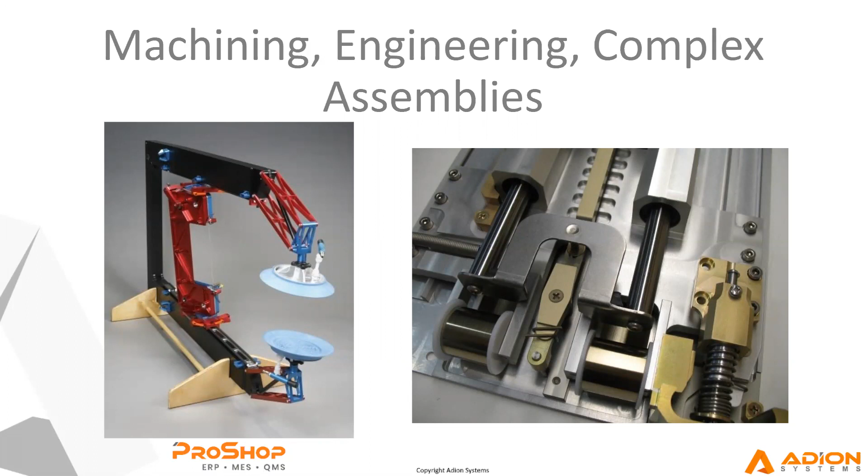So as we take a look, ProShop was actually founded as a machine shop in 1997 with some graduates from Western Washington University in the Vehicle Research Institute. They wanted to take everything that they knew and everything that they did and start servicing the industry. In the Pacific Northwest, most of that industry is in aerospace, but we certainly did a lot of work in a lot of other areas as well - machining and engineering and complex assemblies. We really thought that we could bring all of this expertise into the industry and serve our customers best. We were using Excel until about 2000.

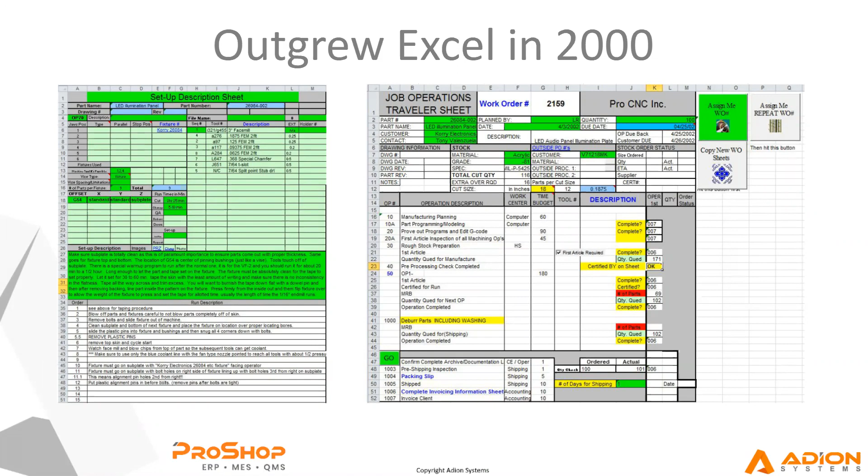2000 happens to be the year that I came on. I'm a machinist by trade, as you probably saw in my profile. We were really just doing everything we could to digitally manage our system and digitally manage our growth. But of course, with Excel, we still had paper around the shop. We were still losing things, and we had no data collection. We were able to see some information if we wanted to dive through spreadsheets or folders, but it was very difficult. So we started developing ProShop in 2000.

ProShop was originally developed in a web browser, where it still is today, and we have continued to grow that software over time.

In 2008, keep in mind we were a machine shop, but our largest customer came to us and said, hey, we want to buy your software. This is Rich Olson—he was actually an employee of ours, moonlighting with us on the weekends. His main job was working with our largest customer, South Arrow Marine. They approached us and said, let's take a look at your software. We think, based on what Rich has said, this could be a really big thing for us.

Of course, being a machine shop, you're like, that's crazy, what are you talking about? But they were fairly insistent, so we helped them implement it. In the first year, they saw huge gains: 20% overhead reduction, 90% reduction in late orders, 400% planning throughput, and 300% ROI in that first year.

At that point, we as a company stood back and said, okay, we must be doing something right. I think a lot of those things were what Jamie was talking about earlier—being able to address what the job needs, being able to address what the customers' needs are, and being able to see that all within the system.

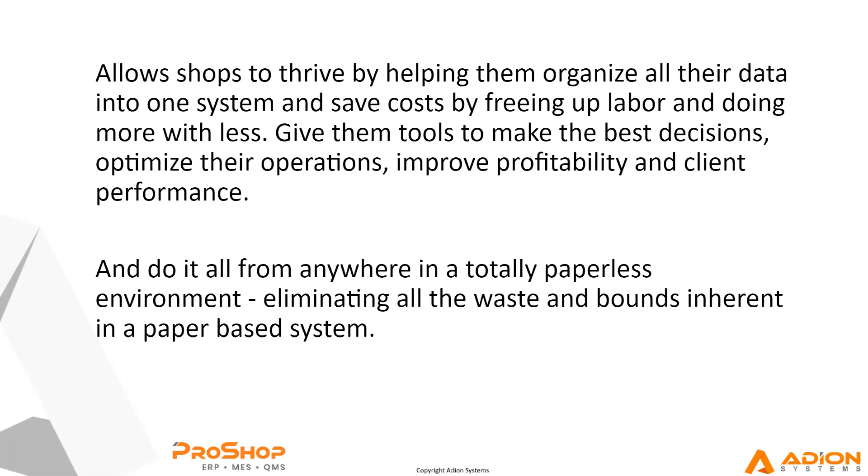So as we take a look at what tools ProShop has to offer, I've just got a few quick slides here, but I like to say that we do everything from the front door to the back door.

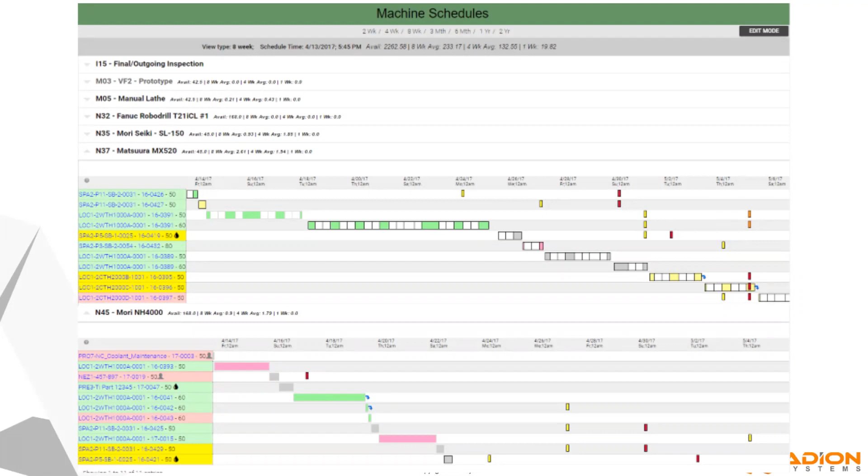So when new work gets entered into the system, whether that's right from estimating or from customer service, all new jobs are automatically created on the Gantt charts, and then they're automatically updated as work is accomplished. Really what we've tried to do is boil down schedule management to just that, actually managing the schedule, not having to input data and not having to update things. We want the system to do that because it's already collecting all that data automatically.

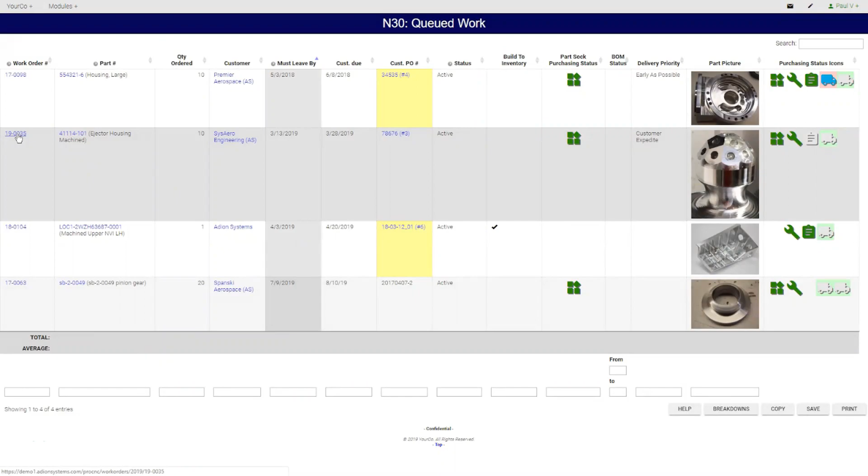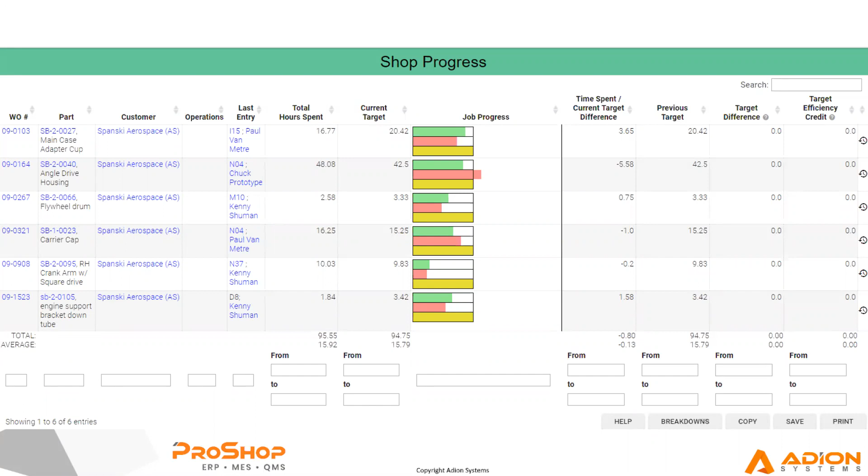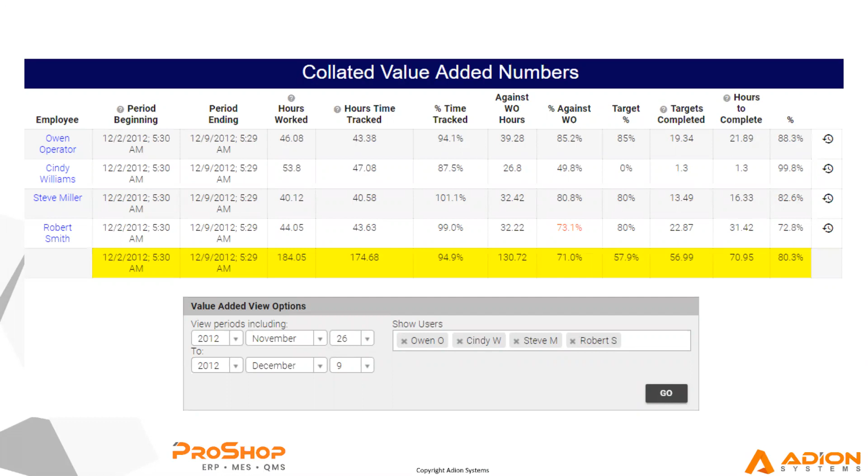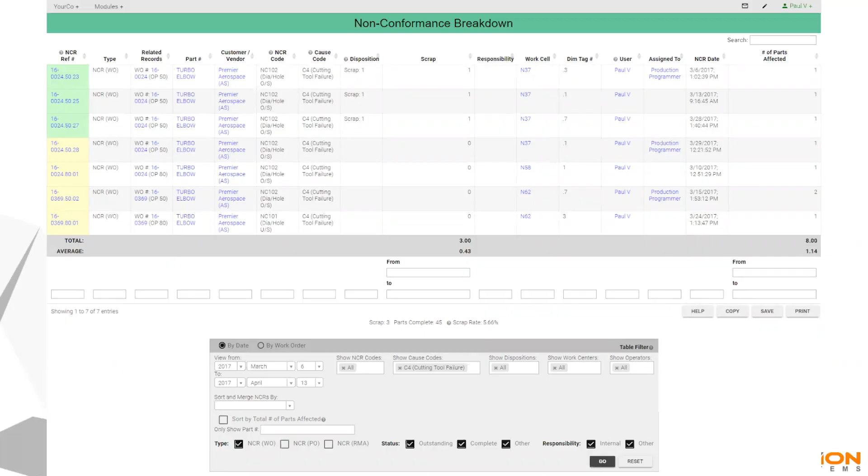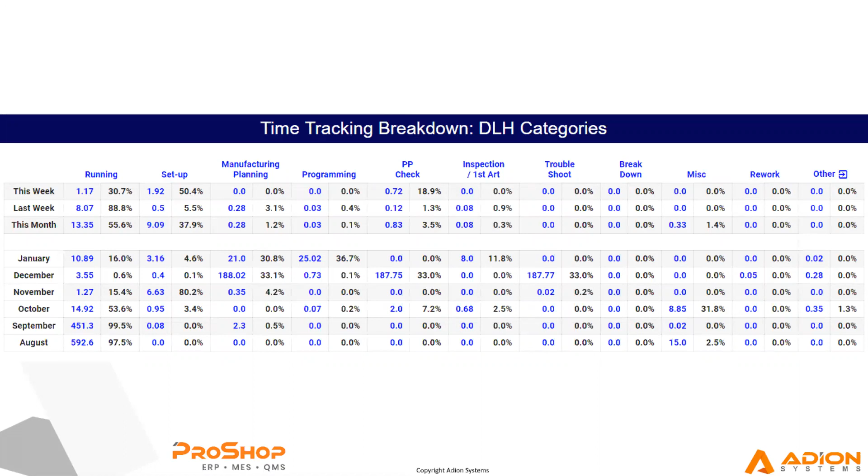As we're moving through time tracking, we move into a much more granular view of what you're doing. We move from a macro view of how the shop is doing into a much more condensed, granular view of where you're spending time as a company. Are you doing running and setup? Are you doing a lot of troubleshooting or miscellaneous? This is just one screen, there are several for this. You can even see how much time you're spending on maintenance, cleanup, Kaizen, or general improvement. All of those are options you can track and report very quickly and easily in the system. I'm going to jump now to a live demo to give you a sense of what it's really like in ProShop.

As I mentioned before, we're a web-based system, so we're all in a browser right now, using standard browser functions like shortcuts just to get where I need to be. I'm going to start at the schedule again and move right into that. I can see in real time, this is my schedule, and I can see that I've got two jobs on this schedule right away that are in trouble.

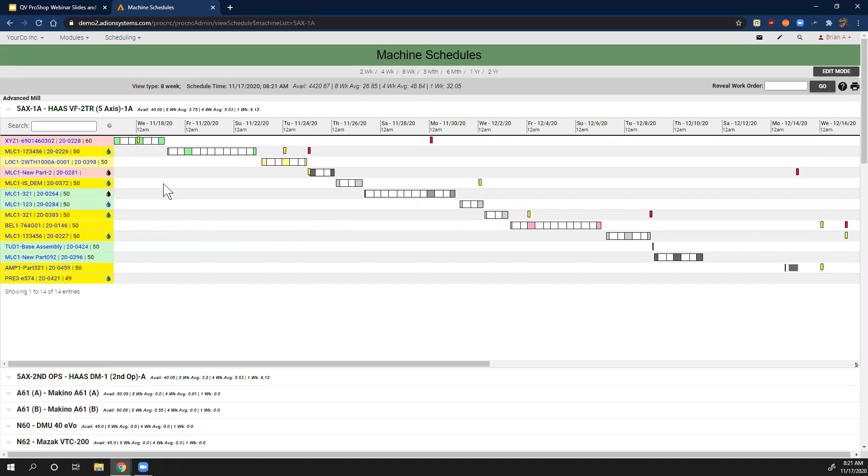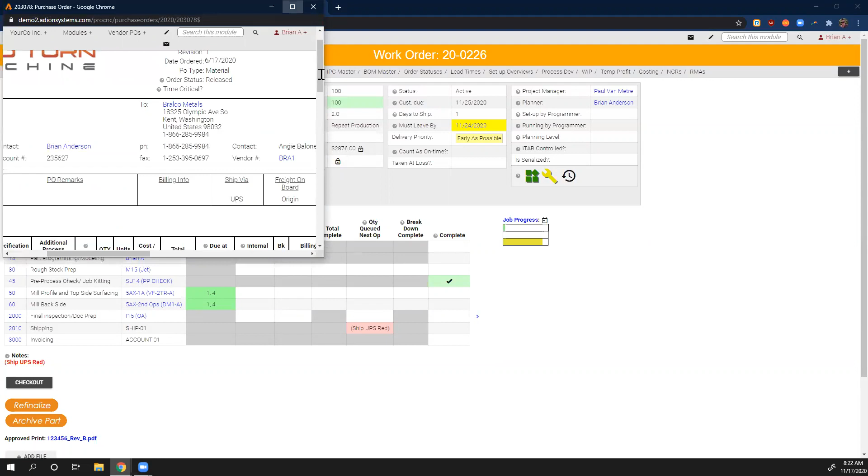As I look through any of these things, I can dive into any information. Maybe I want to take a look at the next job here—this is the next job coming up. It looks like it's still got to get through a little bit of planning, and it's got some material on order. If I click on this, I'll be able to see the material in the purchase order that goes with it, and the material needed for the job along with the material cert that goes with it. All of that is connected and easy for me to find.

If I want to know more about the actual part and how it was quoted, I can dive into an estimate right from there and see all the information I need to know how this job was built from the quoting phase—what was the expectation of machines, what was the expectation of time. All of my out-of-pocket costs and any of that kind of stuff I can easily access from here.

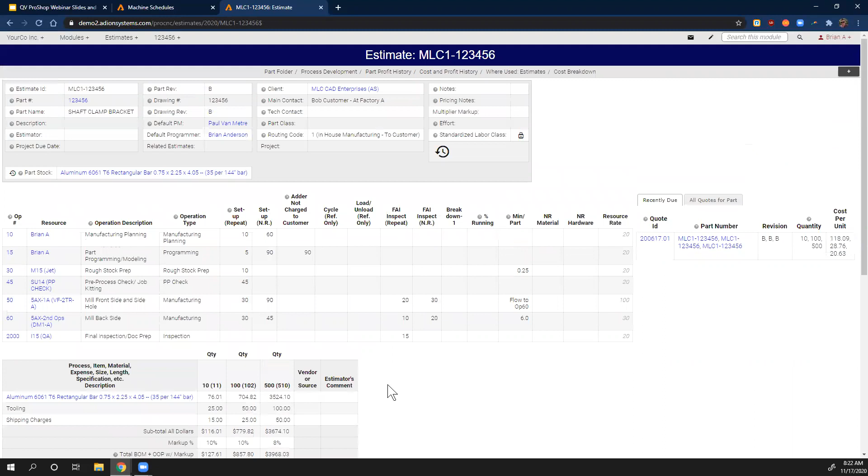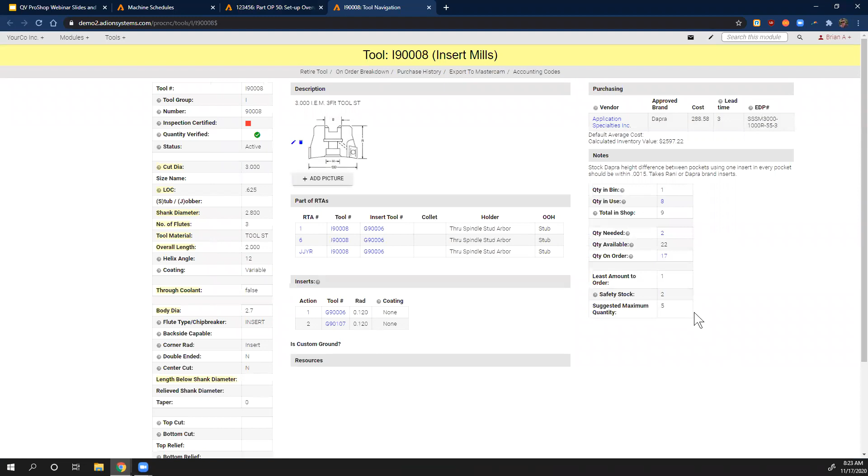When I want to take a look at my work instruction, I'll go into each individual operation and take a look at my built-in work instruction, complete with my fixturing—what fixtures am I going to use here—and all of my cutting tool list, which links directly into my cutting tool module, so I'll see every single tool I need, the tooling information and availability for it. All of my set work instructions, what we call run descriptions, can all be visual.

And all of this can be updated on the shop floor in real time. So if we don't have this information prepped and ready to go, we can give our shop floor folks some tablets with cameras, or their PCs will do the same thing, just to add that information in real time as they move through the system.

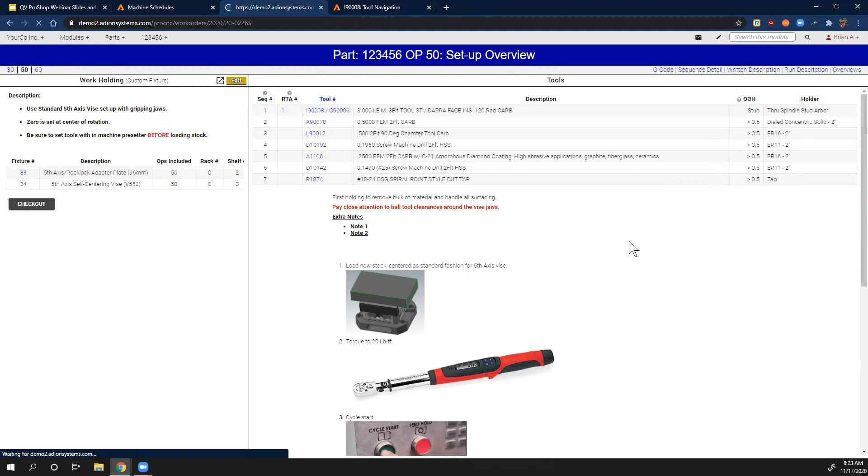I think I'm getting pretty close to the end of my spot here, but a couple more things, and I think Chris is going to actually take up and talk a little bit more about this.

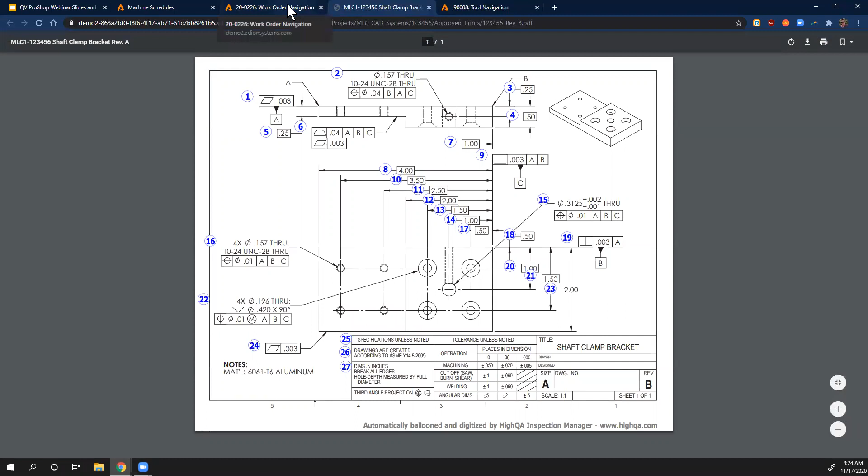We also have the built-in—and this is kind of where HighQA and ProShop merge—the built-in quality system within ProShop. So if we want to take a look at our approved print, we can take a look at our approved print. I can see that's the one that's already gone through HighQA and has the data brought in.

And we can see that as I move into my inspection, I actually have an inspection—oh no, I'm sorry, I jumped ahead of myself here. This is actually what Chris will be talking about: bringing that information in from HighQA and filling out our inspection plans.

All right, Chris, I think that probably is a good spot to transition over to you. I don't know if anyone had any direct questions for me at the moment.

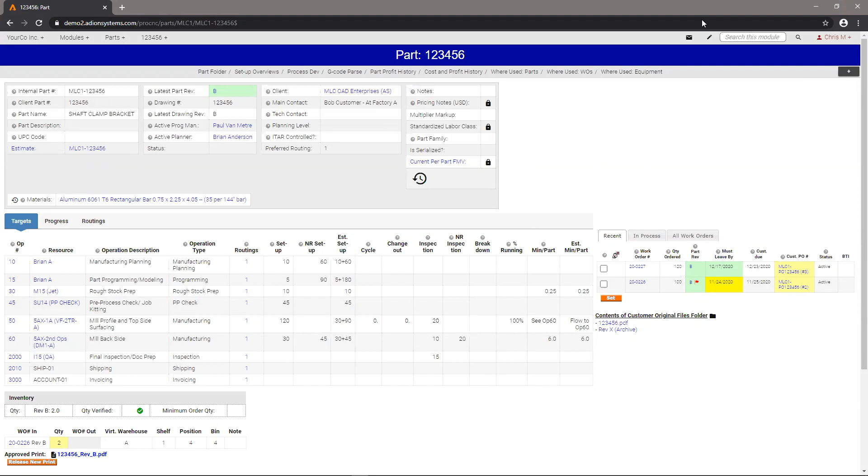Picking up where Brian left off, the intersection of ProShop and HighQA comes with regard to the op details here.

Something I really like about ProShop is that most ERP systems stop right here, but they allow you to go into the op level. So if we have a rough stock prep or this mill profile, mill backside op, I can drill into them. And like Brian was showing, I have different information sets as part of this operation.

Somebody had already asked a question within the Q&A about how to interlink operations from HighQA into Inspection Manager and what that looks like. So I'm definitely going to get into that. That's a key part of this whole setup.

What this looks like is there are specific ops where we want to import specific inspection criteria to. Now with ProShop, without a system like HighQA, you would have to hand type in all of the requirements, manually balloon the drawing, and upload it. That's where HighQA is able to come in and add substantial value.

So I want to shift over to HighQA for a minute here to show you how that side of it works. But just keep in mind that we have operation 30, and then operation 50, 60, and 2000, where we're going to do some inspections.

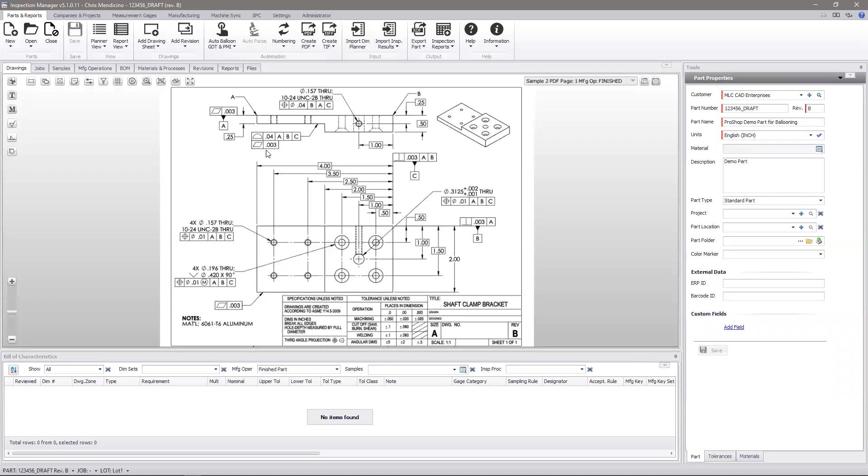So we have a very advanced OCR technology that lets us take this drawing and interact with it. I can zoom in and out to work with this drawing file. If we have multiple pages, we'll have a whole panel here where I can shift between multiple pages. This one just has a single page though.

And we've got our part criteria. So Inspection Manager runs on a database, very similar to an ERP type system, where we would say okay, this is my customer, this is my part number, part name, and rev. And we would want those to match whatever we're building in ProShop.

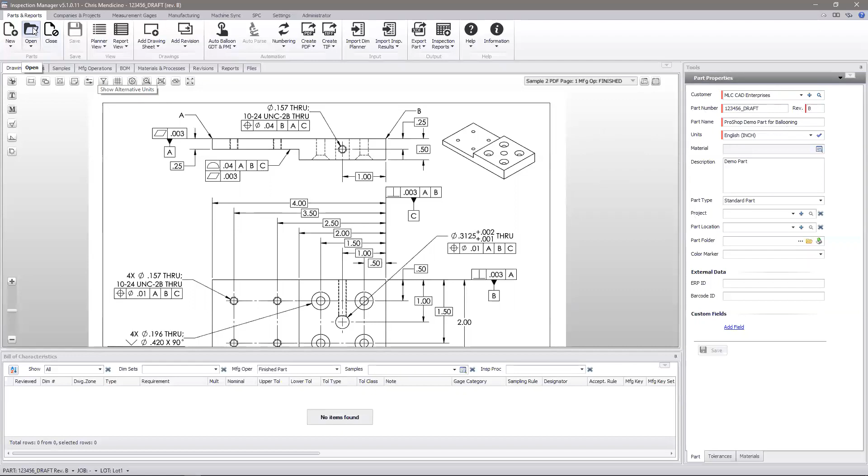That way, when I go to my open repository here and run a search for a particular part number, I can just pull that part number up very easily and see that in the system. I've got one here that's my starting point, and one that's a little farther along for the sake of time.

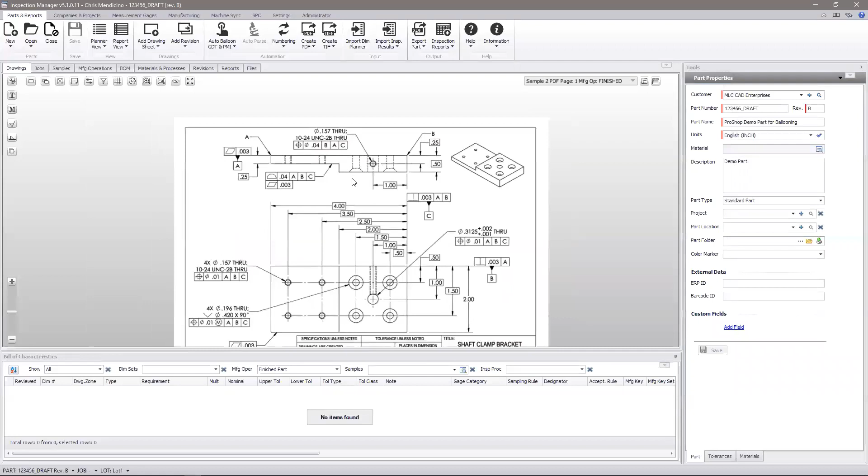So to start off, we're going to take this drawing and just auto-balloon it. I'm going to click up here. I have a few settings for whether or not we want to capture basic reference or general tolerance dimensions. We can do surface finish detection, flag note detection, and fastener and weld if we had those license options.

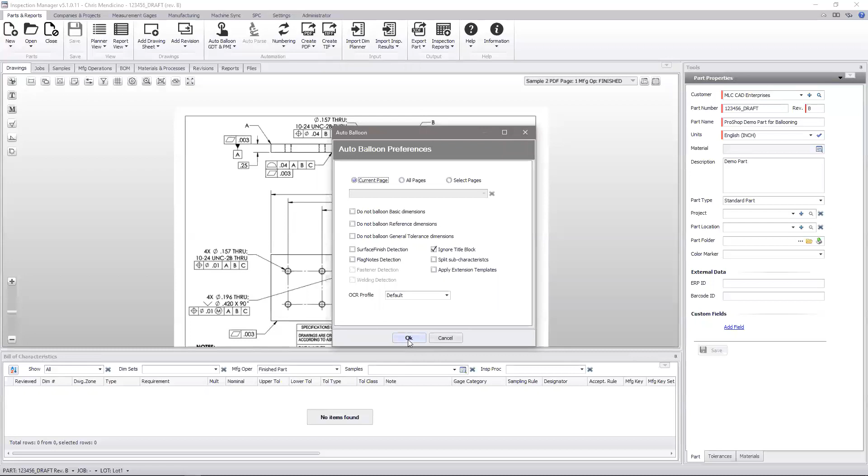So we can do all pages at once, or the current page, and I'm going to just let this run with the default settings here. What this is doing is scanning this PDF as an image—there's no data necessarily in the PDF file that's giving us any assistance here. It's truly just running this and extracting all of the data.

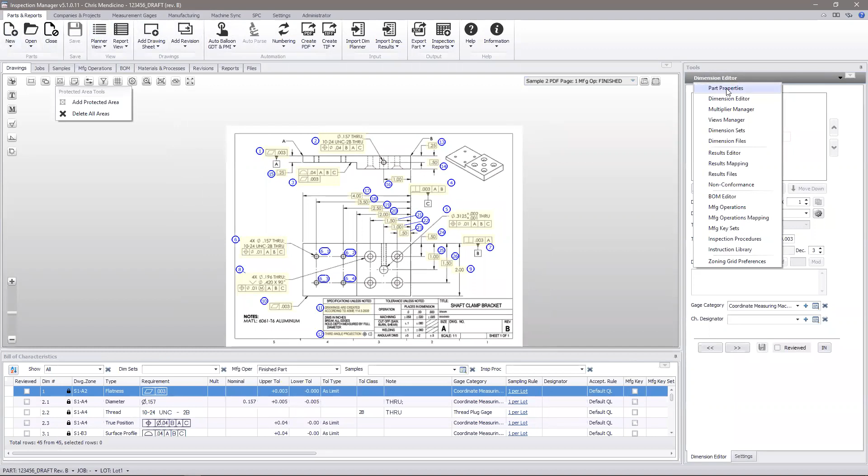Here we go. Alright, so we've got something kind of like this set up. I want to just do one thing real quick here—we're going to go here, like so.

We're going to try that one more time. I think there was a small shift in the way I had those parts set up and linked, so we're going to let that run.

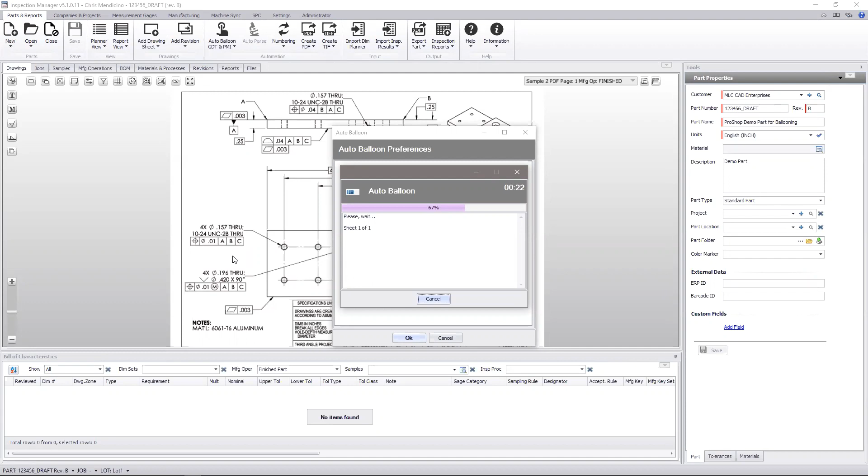So like I said, it's scanning this as an image to capture the dimensions. And one of the things we excel at is recognition of GD&T characteristics, which even other ballooning packages don't do from an OCR level, definitely not automatically.

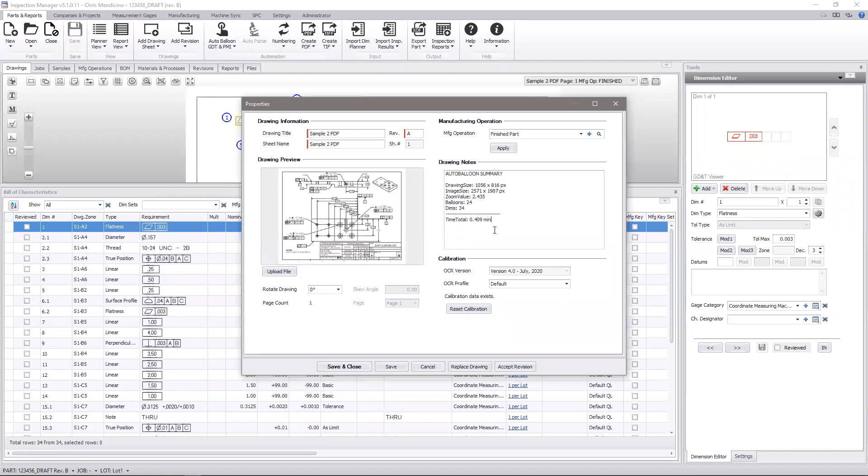Being able to capture all of these dimensions automatically, just like so, it found where all the dimensions were on the print, did the ballooning, and populated this entire bill of characteristics. That only took about 25 seconds. If I look at my sheet properties, I can see my stats, 0.409 minutes.

So being able to extract all the characteristics and understand what's here—the dimension, the type, the requirement, nominal, upper and lower, even the tolerance types.

When there are multipliers on dimensions, like this where we've got 4x because there are 4 instances of a hole, we're picking up the fact that there are 4 instances. You can see those here.

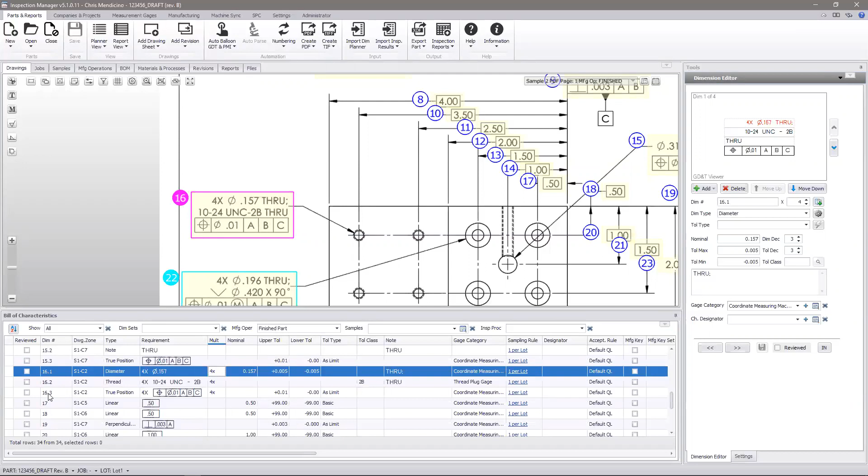We even understand feature requirements, where this hole, we want to check the diameter, thread, and true position. I can detect all 3 of those features, and we make those sub-characteristics like this, 16.1, 2, and 3. So a variety of ways to deal with all this.

We have an impressive dimension editor, because as mentioned earlier in the testimony, you may have times where there are poor quality prints and things don't come in perfect. Typically you'll have about 85 to 90% accuracy and need to do a little touch up, but you're saving a substantial amount of time.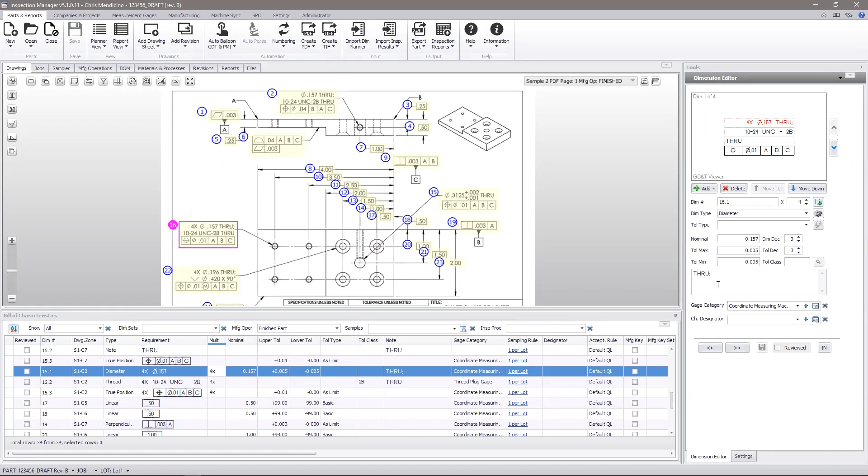You're taking hours of work and bringing it down to minutes instead. That's because we give you all the tools you'll need to edit the dimensional criteria and dial it in exactly how you want to inspect the features.

We can assign things like gauge categories, as you'll see here. I actually have an automation rule in place that, based on dim type, assigns particular categories. Like for my thread here, it automatically assigned a thread plug gauge.

You can do that with any of the gauge categories we have by default, or make your own custom categories to really align with what ProShop has in their system—you can match everything up. We can also assign things like designators, criticality, and so on.

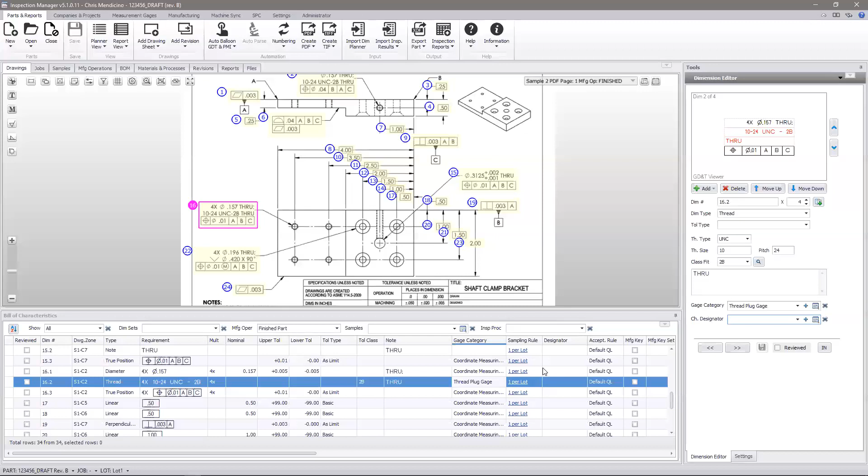Okay, so let's talk operations for a minute. I'm going to go over to my other part, pull that up real quick. We've got this guy here—I already broke this one out into operations to match what we had in ProShop.

Inspection Manager starts with the concept of a finished drawing, and then you break out the individual ops you want to inspect at, defining the particular dimensions that get checked at each operation. The way I did that, I'll show you as an example here.

I would select some particular features like this—I can do that graphically on the drawing, or by picking through my list down here. And I would just add an operation, which adds those dimensions to that operation.

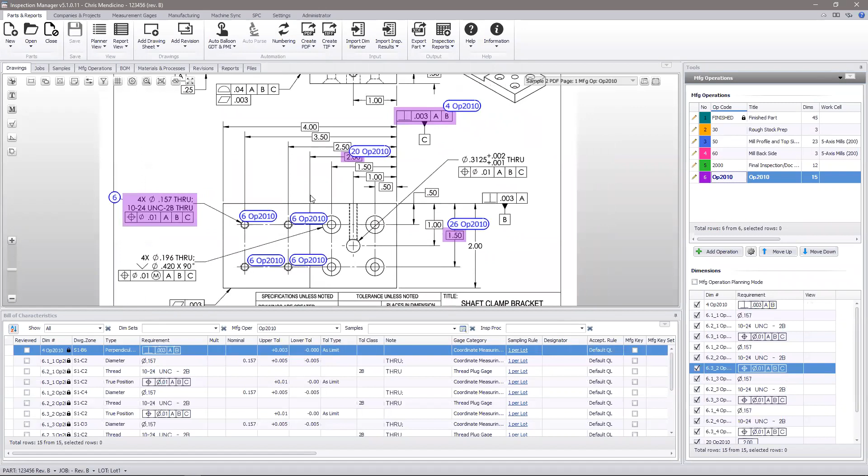So I can even see that operation just with a specific op drawing. You can see these dimensions have an extra tag at the end of them now, because they are dimensions related to that operation specifically.

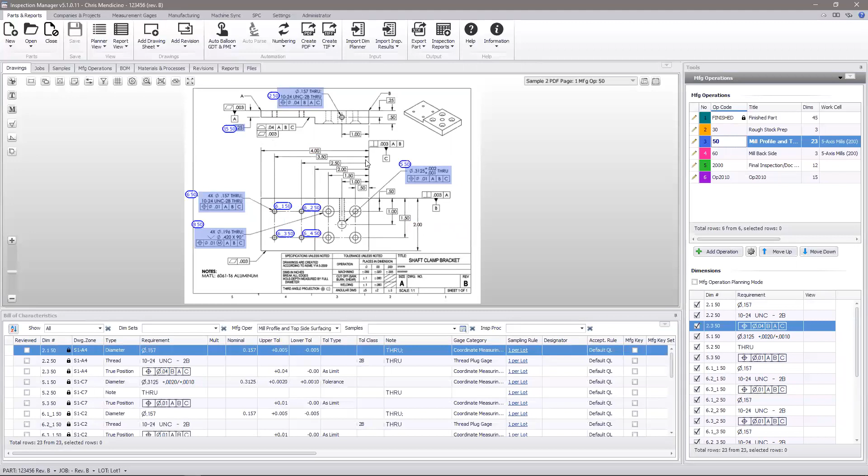And I can see that for any of my operations, just to see the unique inspection criteria or requirements and drawing at that stage. These drawings can be exported and uploaded to the operations within ProShop if you wanted to, or you can just have the finished drawing exported and brought up to ProShop.

So as you'll see here, once you have this all ballooned and set up, I can just click one button and generate my balloon PDF. This is what Brian had uploaded into ProShop, something just like this.

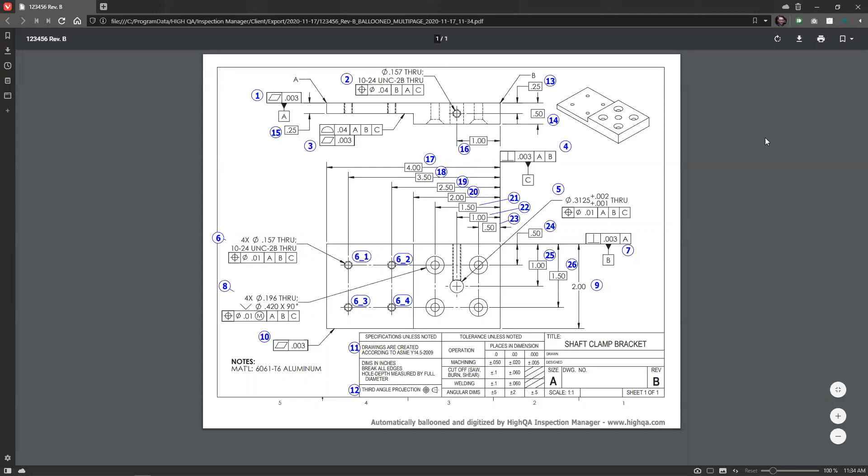After we set up the manufacturing operations aligned with ProShop, all we have to do to share all the inspection criteria with ProShop is come up here to our export ProShop CSV. This is a customized CSV built just to specifically format the data the way ProShop needs to see it. For those already working with ProShop and HighQA, we just came out with our latest version, 5.1 of Inspection Manager, and we added a few new details that help streamline the process.

So the way this works on the ProShop side, now that I've exported my list of characteristics, I would come up from my part record and launch my CSV import tool. I can pick my file, or I can just drag it in like this. I've got the file opened here, so I can drag it in and it brings it right into my system.

This gives me a preview of the CSV file. Because we launched it from the part, it knows the part I'm at and it knows the operations here. If we scroll down, we'll see operation 30, 50, and 2000, with all the dimensional criteria per each operation, the balloon numbers, the type, and this is something new as of 5.1, as I mentioned - we're now putting out the multiplier like this.

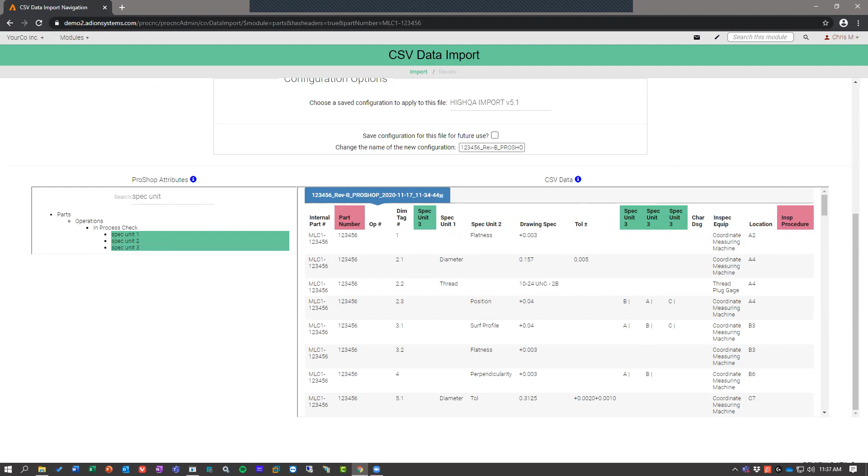Now to import this, I'm just going to grab my configuration that I have here. I've got a stored config file that automatically maps the different columns, so it says which data is being sent to which area of ProShop. There's one spot here where I'm just going to drag this over to grab those, since they didn't store in the config, and we'll just say review the data.

I can get a preview of this data like so. Oh, I left that operation in there that I just randomly created - didn't mean to do that, but that's okay. We can even click into these to see the specific dimensions being brought in per operation, so I can click and review it to make sure the data is being segregated correctly. Then I would submit and hit okay.

And that's going to import all that data to that part. So we get this nice little bubble here - it says successfully imported 1 of 1 records, and it brings us to a lookup of that part. So I can just click into that part now.

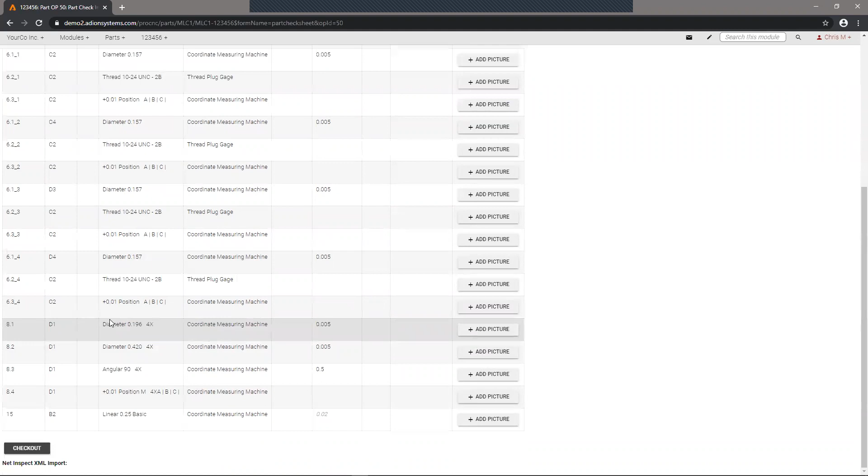When I go to each operation, like let's look at op 50, I can look at the part check info - let's actually blow it up to the whole thing. You'll see this now populated that entire list of requirements within ProShop, bringing all that data in with the multipliers, the types, the requirements, and the measurement devices that are going to be used.

Now, for those of you who are already ProShop customers, maybe you're curious - I didn't set this up for this particular demo, but whether or not this is the final inspection criteria, you would check the box for which items are checked in process. We can also designate that on the HighQA side and have that data shared directly into ProShop if you had it set up that way. There's a lot of different nuances we can configure based on the individual needs of the customer and what they're looking to establish for their standard operating procedures.

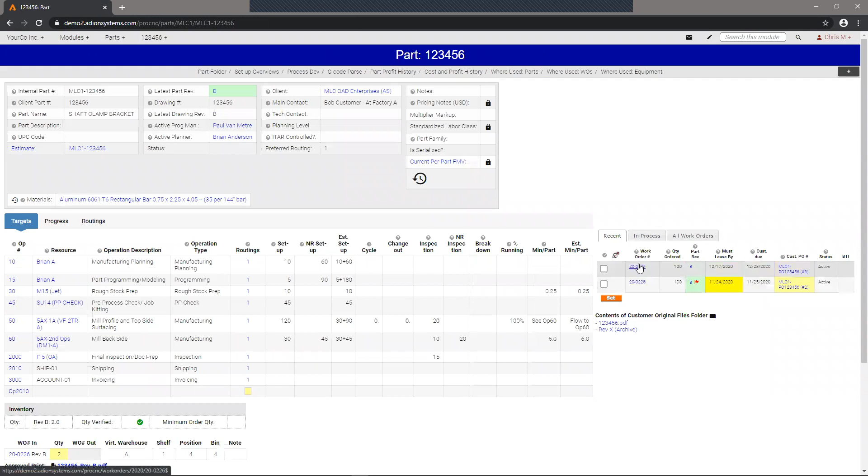So I'm just scrolling through here to see the output for the different ops. Now, Brian, this is an area where I haven't done this as much - let me know if I'm missing something here - but if we go down to the work order side like so, this is the area where the operators would be able to pull up their work order, log in, and start performing work against their particular order.

Now, Brian, do I have to refinalize? No, that information is live.

It feeds from, so in ProShop, we have the differentiation between the part record and the work order record. The part record is essentially like a router, that's where the manufacturing plan lives, and it feeds the work order. The work order is very much similar to what a lot of companies see as a job traveler, it's just that it's digital.

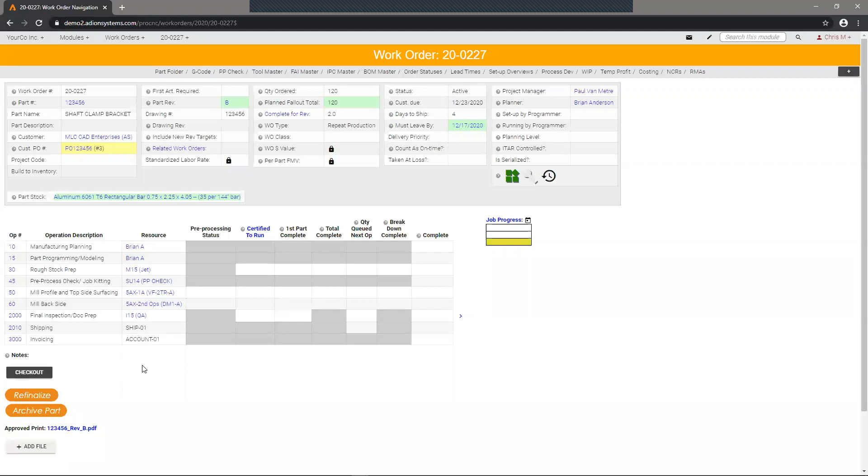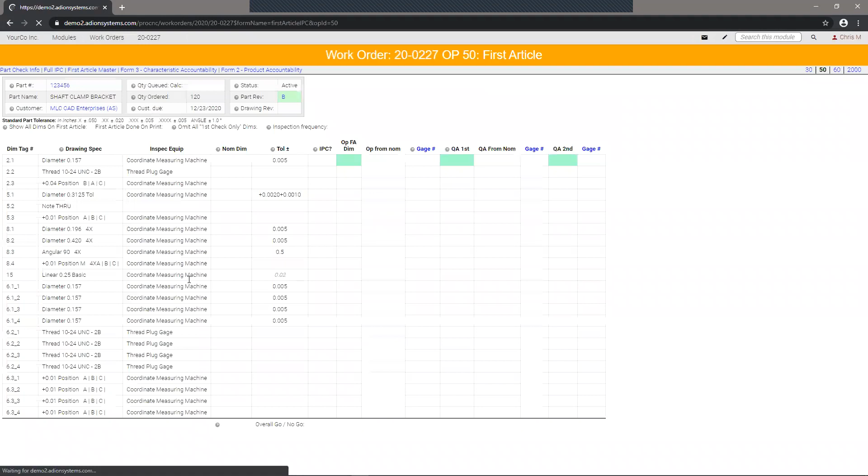So it's really just kind of the one step. So this is where we're logging the status and results of executing that manufacturing plan. If you click into operation 50, for example, and then click on the first article, all that information will automatically be there ready for you to fill out. In this case, this is the first article. We also have the ability to do the in-process inspection, as you had mentioned. Once you get it in, it will automatically feed to your active work orders.

Now, I want to make one quick point, is that ProShop is able to track historical data. So if you've done, maybe in this case this is revision B, but if you've done revision A in the past and you have work orders that were executed at Rev A with a different inspection plan, that's no problem. ProShop will actually maintain those historical records for those old Rev work orders, and then keep all the current stuff current and dispersed to the active work orders. So we do maintain all of that pretty seamlessly.

That's a good point too, Brian. High QA does the same thing as well for being able to manage the revisions. So you can declare new part revisions, do a comparison of the old to the new drawing, adjust your dimensions accordingly, and then you would export the new inspection criteria and upload that to the revved part record within ProShop. So everything's able to stay synchronized there. You'll have the history in both systems, us having the quality information and ProShop having the part record data as well.

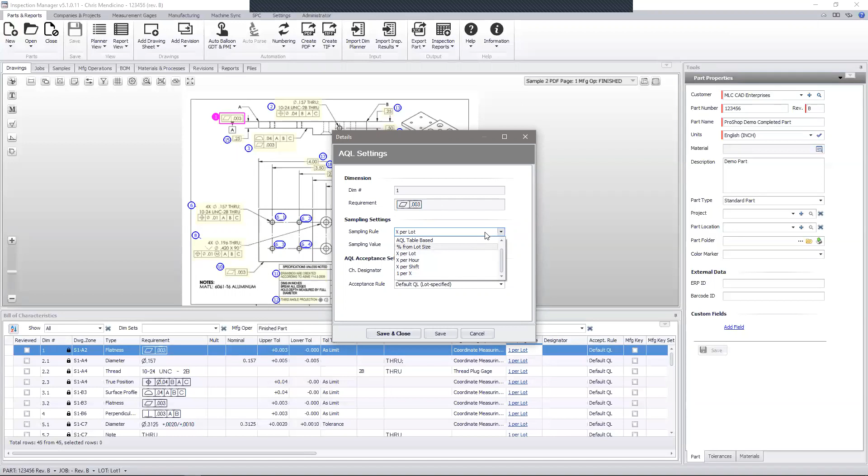So if you want to do AQL based sampling, or kind of like percentage of the lot, or one per quantity, and time-based sampling, all those kind of things, we can do pretty advanced sample planning like that, as well as direct imports from CMM equipment or any automated inspection equipment. We can directly import all of that data and run analytics on it. You'll see I have an SPC tab up here for doing SPC analysis on the results data from your production. And then we can generate all sorts of customized reports, whether it be first article reports, lot inspection reports, et cetera. The system goes quite deep, quite quickly, but both systems, I would say, ProShop and Inspection Manager, are highly scalable solutions.

That offer functionality that you can start to break into and do kind of a crawl, walk, run sort of approach to either system, and get more sophisticated and more heavily automated and efficient as you grow with the system. So that's one of the key benefits to this partnership here, is the maturity of both platforms to allow you to start where you are today. And everybody wants to be more automated. So part of the deal of seeking out vendors that you want to partner with is knowing that you're partnering with a company that has products that are able to take you where you want to be, not just in the next year, but in the next 5, 10, and 20 years as you're expanding your company.